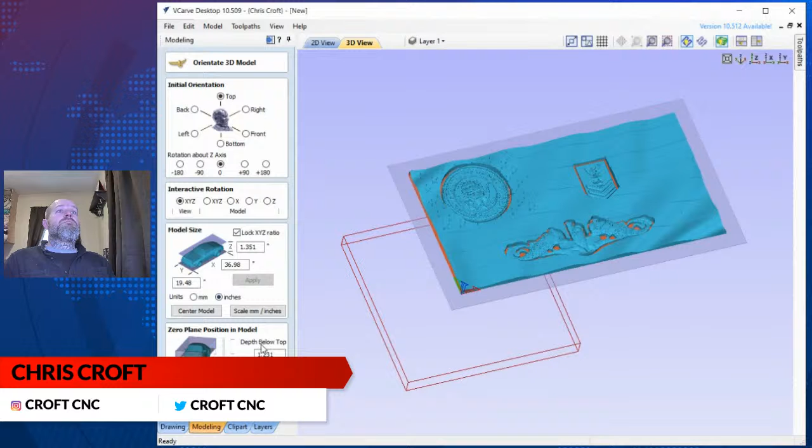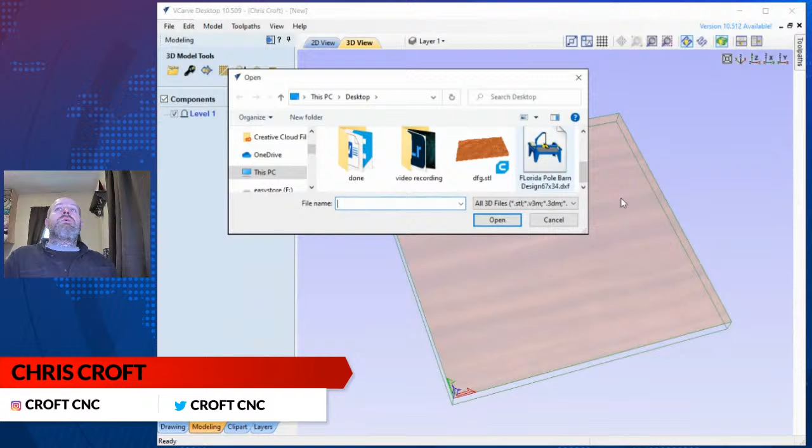Let's see here. We're going to go to modeling. We're going to open that up. We're going to center the model. We're going to lift it all the way up. We're going to hit OK. So this is a 3D flag.

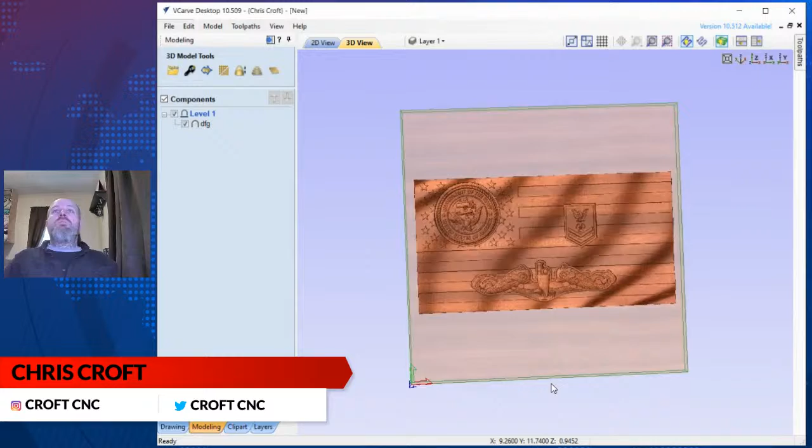As you can see, it's wavy. And my theory is I've got a lot of work to do to it. But whenever I look at this, the first thing that I notice is I don't like this design. And one of the things I don't like about the design is it's not aesthetically pleasing to the eye because everything is different sizes, different shapes, different locations.

What I want to do is I actually want to take this, I'll strike a line over, and I'm going to lift his Machinist Mate second class rank up so that the opening around it will be in line with the seal opening. Then I'm going to take his warfare dolphins and move them over so that the center line of them is in line with the center line of the insignia. Okay.

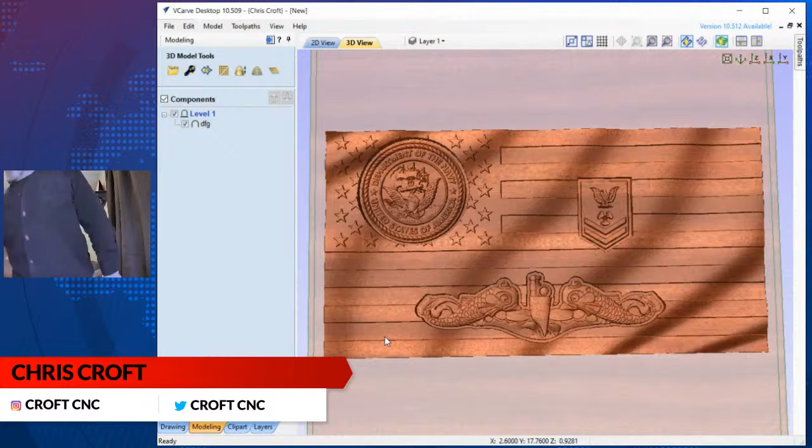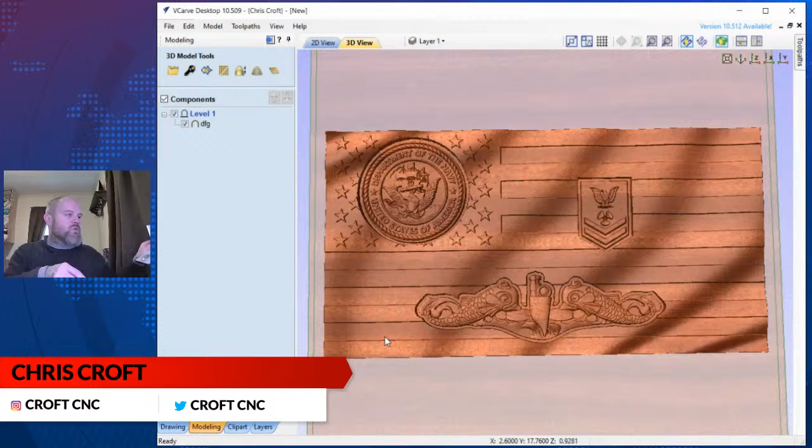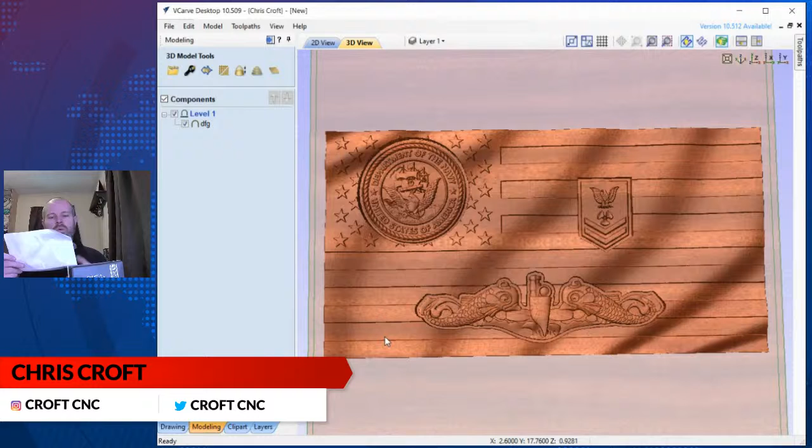And then from there, I actually have, and this is really cool, guys, these are all of my father's ribbons and awards. And this one is the Navy, what do they call that? Sea Service, Navy Good Conduct Medal, National Defense Service Medal, Sea Service Deployment, Navy Marine Corps Achievement Medal.

That's what that is. And he got that for, he was on a nuclear sub, the SSBN Ben Franklin 640. And there was a fire in the engine compartment, and he actually saved two chiefs. And to me that's awesome. So those are things that we're going to design into this flag.

And the way that I'm going to do it is I'm going to figure out how many of those awards and ribbons there are. And in each one of the white bars of the flag, I'm actually going to create a pocket. I don't have any of those saved, but I'll create a pocket for it. And whenever I create the pocket, I'll line up the pockets based on the Department of Navy seal.

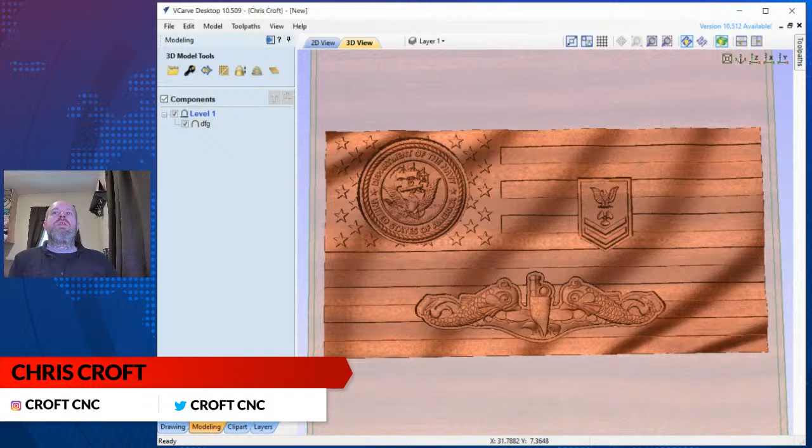Okay, so I'd venture to say I probably still have 40 to 50 hours on this flag. And I've gone through and 3D'd all of these. So when you go through and 3D them, that takes a lot of time, and people don't realize how much goes into it. But I also know whenever I designed it, let's see, I don't know if I'll be able to do this in this software. Oh, it will let me.

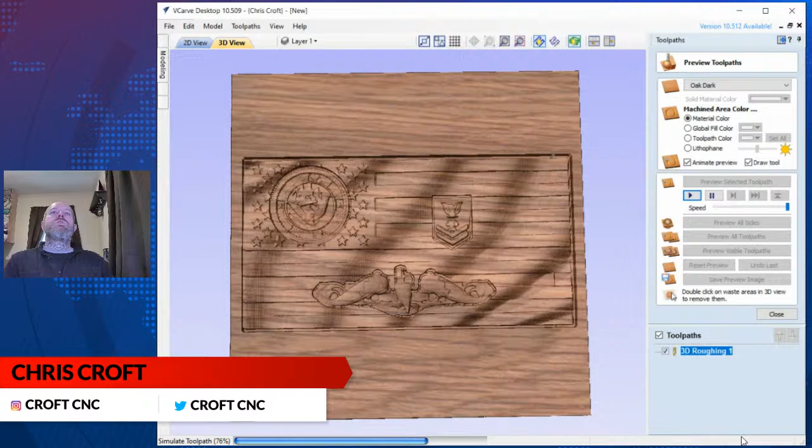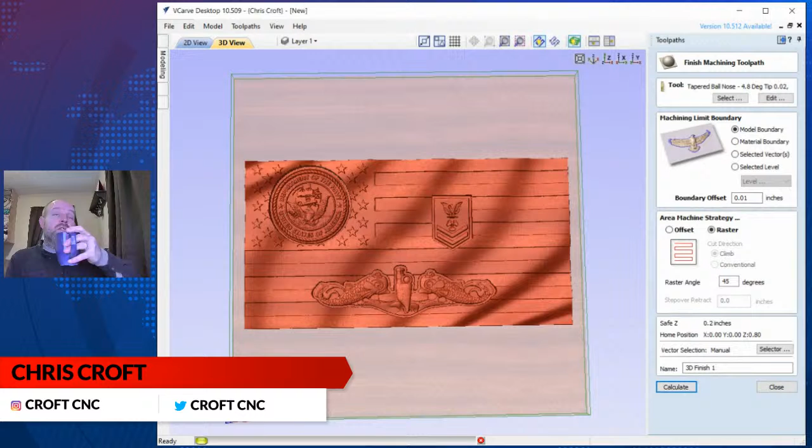So this is what the roughing pass will look like. So when I designed this, I knew that I was going to use a 1/4 inch end mill rougher. Okay. Now I'll go through. We're going to raster cut it at a 45-degree angle. Model boundary. Now it's going to take a while to calculate because that's a lot of code. I guarantee you this will take 10 minutes to render and calculate. So while that's happening, let's see here.

Okay. Do you feel that water jet might be the next step for metal art? No. Haas, the reason why I don't feel that it's going to be the next step is the process is too messy, it's very expensive, and it's very slow. I think if at all, it's going to be laser, just for the simple fact that that's where everything will be at. Laser cost is coming down.

You can buy a 4 foot by 4 foot, 2000 watt Chinese nitrogen laser for 60,000. You can buy a 6 by 12 double shuttle 5,000 watt nitrogen for under 300,000. And that sounds like a lot, but whenever you're pumping stuff out, you basically set it and forget it at this point. So I don't see water jet making a big come up in the metal art industry any time soon at all.

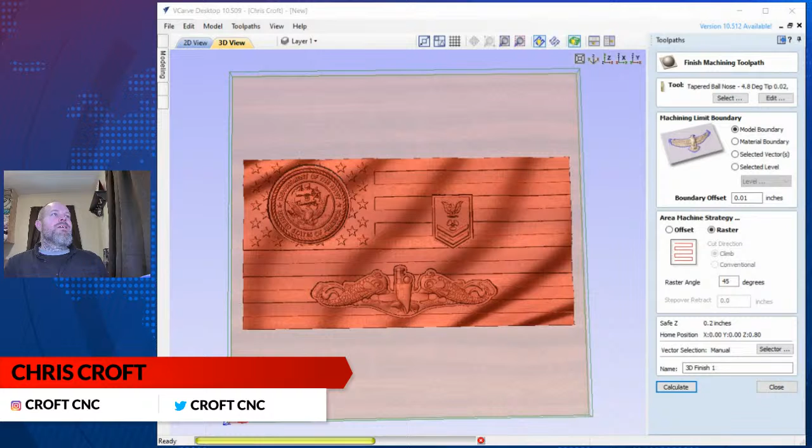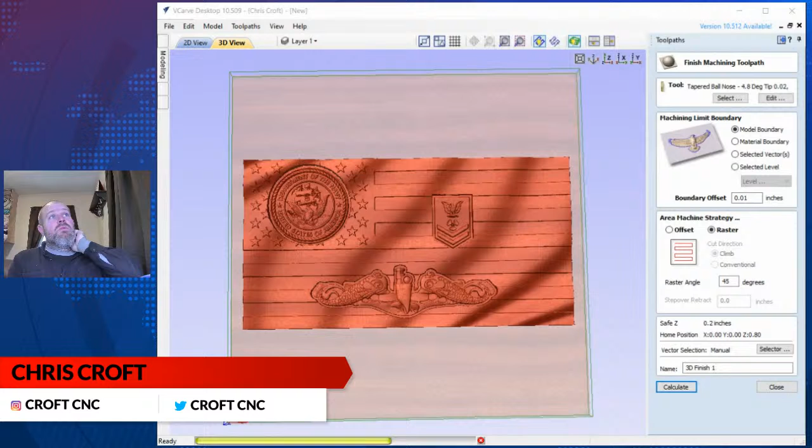Let's see what we got here. We're over halfway. So whenever you guys are designing these parts, or you're paying somebody, you have to realize, whenever you come at me with something, I have to have all kinds of information. You're going to be off and on the phone with me forever because I want to know what tools you're using. I want to know,

Sorry, I'm checking messages, making sure I'm not missing anything.

So you have to design your parts, and you have to realize if you're paying somebody to design your parts, you've got to give them the time to actually sit there and design your part for you. I need to know what your finished material is going to be, what your rough material is going to be, what tooling you're going to use, what size.

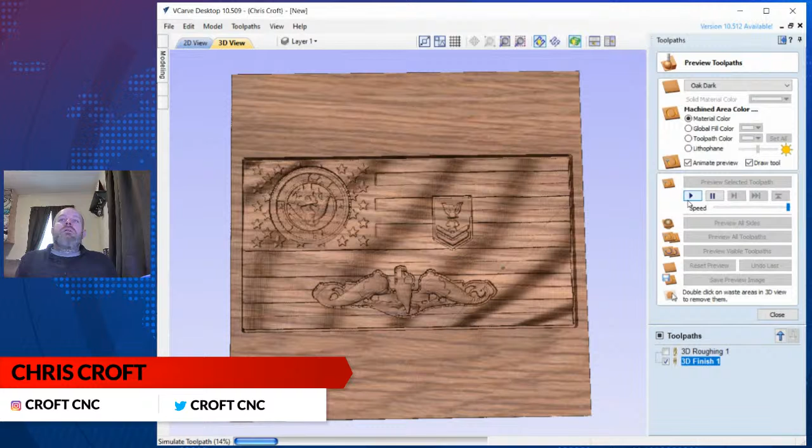Look at that cleanup pass. Now imagine that being done in an oak and a black walnut all slabbed together. That's going to be gorgeous. He might not get it, I might have to keep it for myself. That thing is going to be awesome.

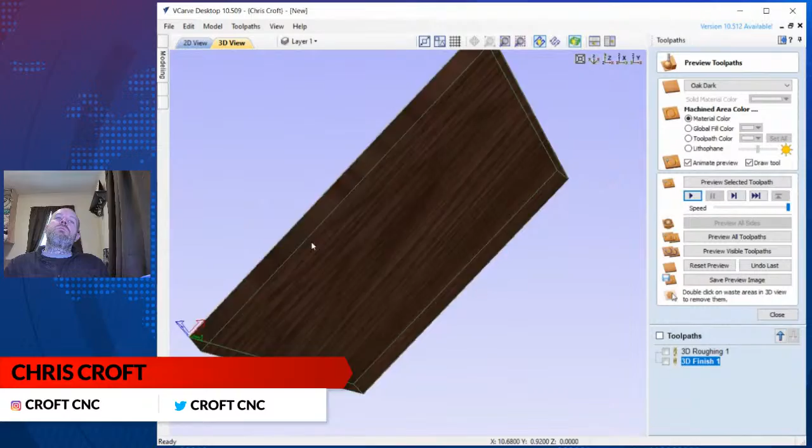But you get the gist of where everything's at now. I mean, look at the waves in it. Now, what's really cool is this will actually be a separate piece that I'm going to do out of a different wood.

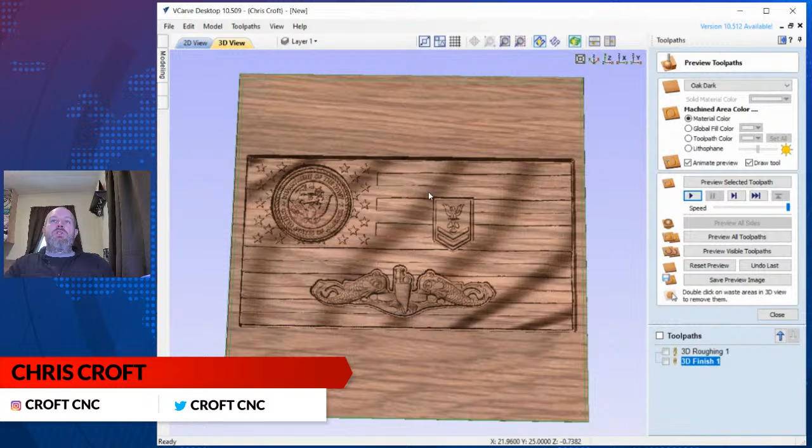So I'll actually just create this pocket. And same here, I'm going to actually cut this out in an exploded looking setup and char the outside of it, and then I'm going to cast his rank in aluminum and float it in there.

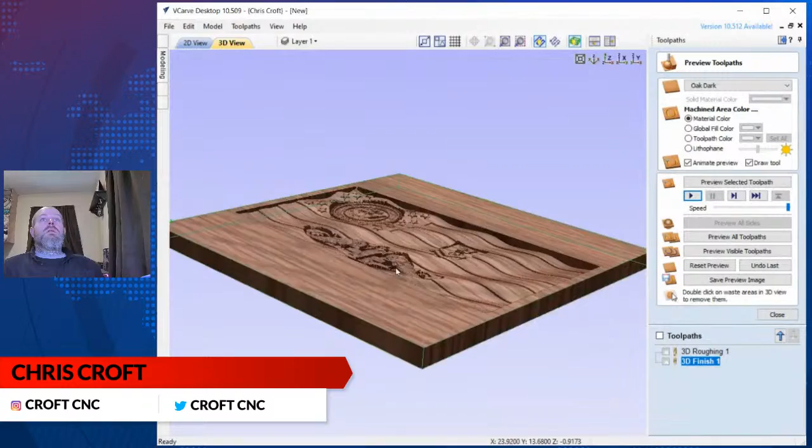But I mean, that right there is what it's all about. I think that's just awesome. So that's that, I don't have much more to go. Do you guys have any questions on controllers or design?

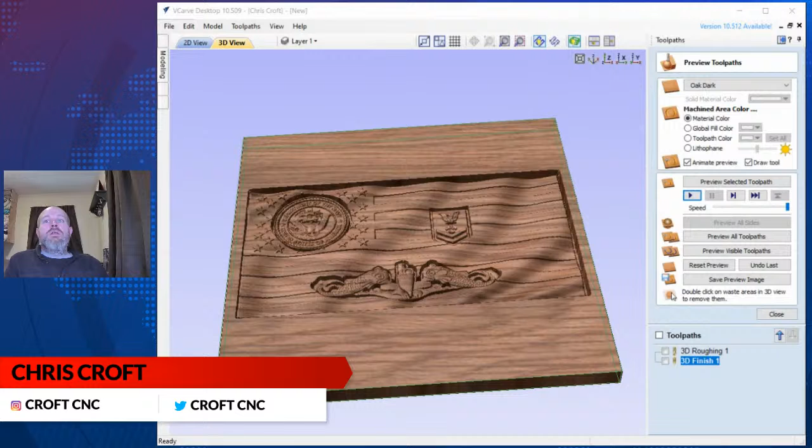Nothing? Okay. Yeah, Hoss, I actually do rest machining. I like rest machining myself. The only problem with rest machining that I see is the fact that you have to take such a long time for it to design it.

So what are you doing more of? Are you doing design work time-wise, or are you doing machining? You know, one way or another, either way, it works out well. Like I said, I use rest machining a lot.

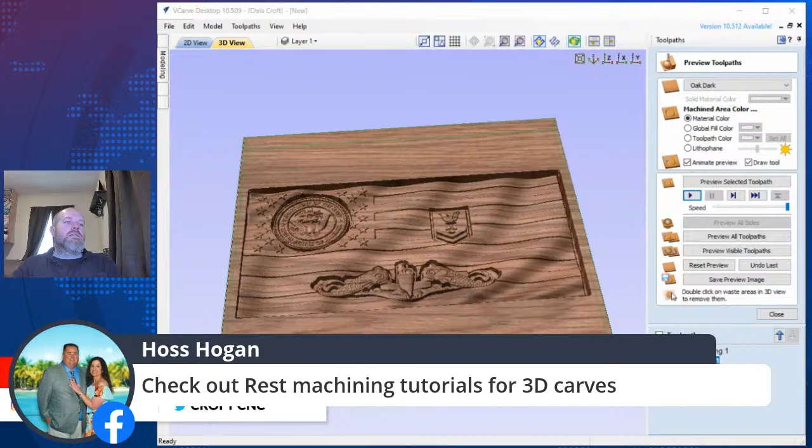And when you're talking about rest machining, guys, what he's talking about is - let's see here. Mark Lindsay CNC has a great video on rest machining, and I tell you guys, you really should take a look at it.

What I'll actually do for my stuff is I'll do carves and stuff like that in sections. So I'll carve the wavy flag first, and then I'll go in and I'll actually pocket out the opening for the seal and the insignia and the warfare dolphins, and go from there. That's something I just think looks really good. I think that it operates well.

You know, that's just what I think, that's not gospel in any way, but rest machining is something that will cut down a lot on your time. Yeah, Hoss, you can - if you're doing large cuts like that, like this flag, it'll probably be a 13, 14 hour carve. I'm hoping the CNC Newbies machine will speed that up quite a bit.